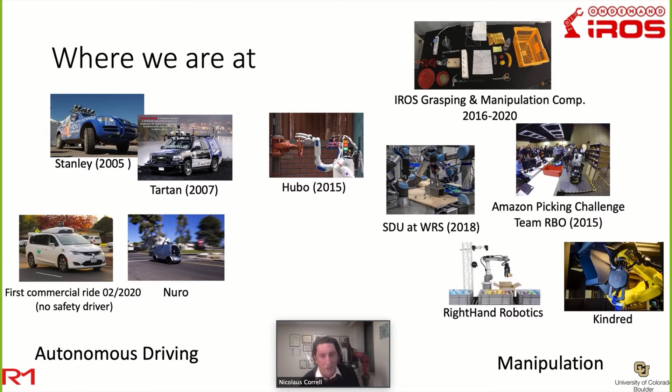The manipulation market is quite interesting because everything is already quite automated. If you think about, for example, a light bulb that goes off in your house, there is a system that would probably know that already. It could order this thing automatically and trigger this entire process of the raw materials being brought to a factory and then eventually shipped into a storage facility. And once you need your light bulb brought to your house, it has to be plugged in, and the old one has to be recycled.

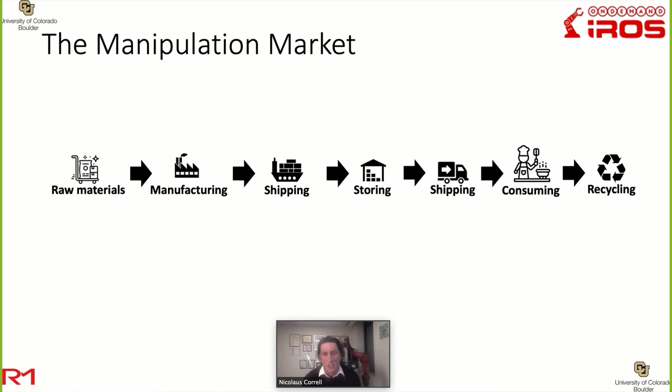Now, all of this is quite automated or could be automated except for the manipulation aspects of it. So we have companies that are working on that specifically. Since the 80s, we really have industrial assembly, welding, and things like this, and it's all very well known. More recently, we have a new breed of robots that are doing things more autonomously.

And here I try to put up a couple of companies right underneath where they are in that chain of consumption. So now you see there are even robots that can feed people. There are robots that can pick things out of shelves and fulfill an order. There's AMP Robotics here in Colorado that does recycling. But what these robots still don't do is they're still not really competing with humans when it comes to general manipulation. They are still machines that are purpose-built for their specific application.

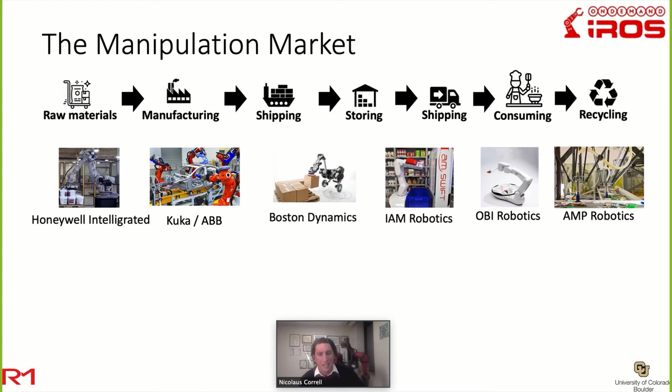So I think the challenge for us as a research community is to really get there, unearth that potential, because then you would have a robotic solution that could do all these things much like a human can.

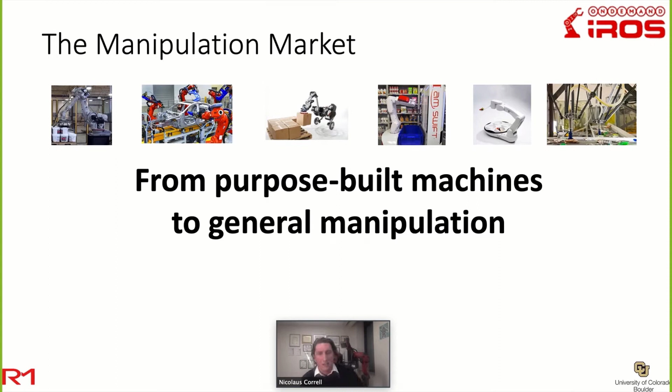So to understand what manipulation is, most people think about grasping as the problem of finding where to place fingers onto an object, so to get a constraint and not let it slip.

The actual real challenge is to put these constraints on the object at the same time. So if you think about a screw standing on a tabletop here, we all know how to grasp it with 2 fingers, but if you close your gripper now, the screw would fall, or worse, it would actually spin out of the gripper and leave the table.

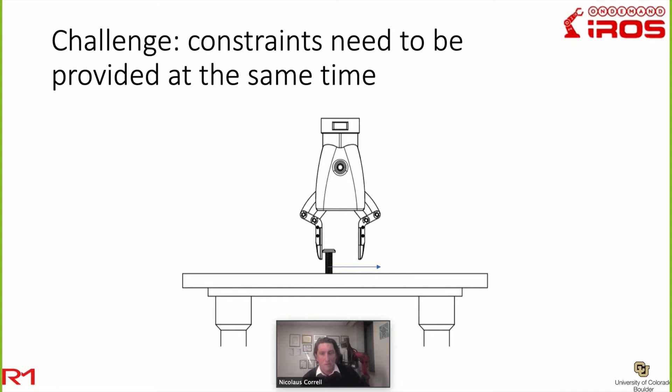So in order to solve that problem, you have 2 options. Either you increase perception accuracy, so you make sure you really know exactly where that screw is, and you position your hand accordingly. If you're lucky and you close your fingers, you will just reach the screw from both sides at the same time.

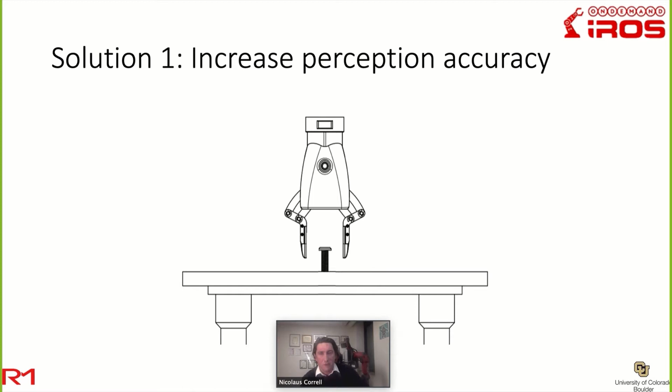The alternative or complementary thing you can do is use compliance. And in this case, the fingers are kind of spring-loaded. That's the best way to imagine it.

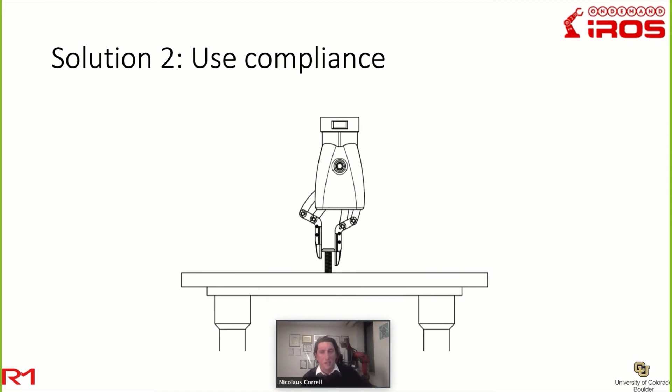They just keep closing until they hit something, but limit the force with which they do so. If you have very sensitive force control, you could imagine grasping that screw with two fingers without it falling or slipping. So in order to address these challenges, we developed a tactile sensor that can both increase perception accuracy and measure force.

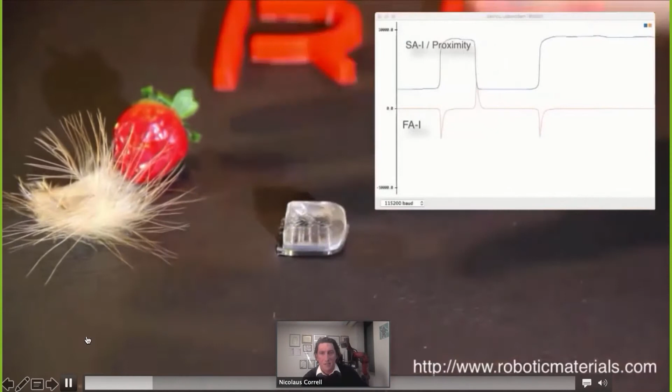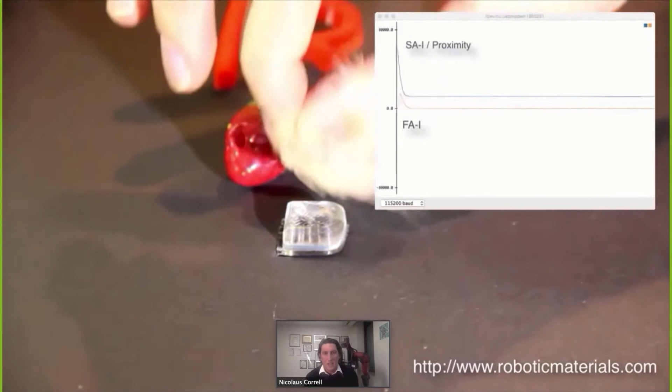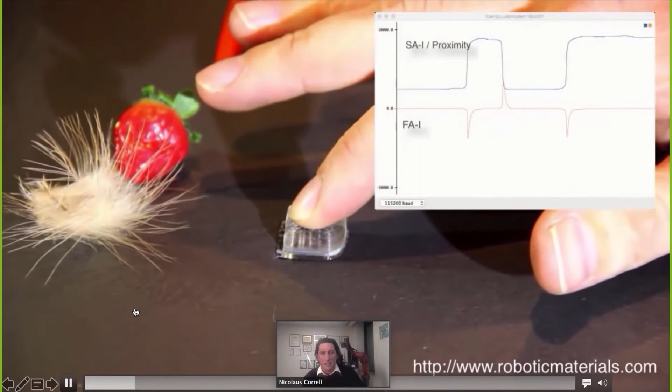So here it is. You see, we press it down, and I label these things SA1 and FA1, akin to the human tactile sensing system. What you see in the FA1 signal is the actual touch event—there's a touch and release event, let me play this again. Whenever the device gets touched, I get these peaks in the FA1 channel. At the same time, I see in the proximity signal the strawberry approaching in this case.

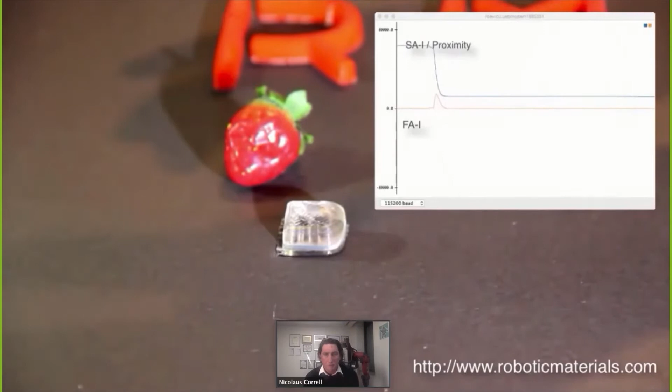So we were quite excited about this. Here's how it works: it's an infrared proximity sensor integrated into a flexible, transparent polymer of known width. The idea is that if I shoot the infrared out, I can get it reflected from an object and measure the distance to it. But I can also measure the deflection of the material when I exert some force—this is simply Hooke's law, F equals spring constant times displacement, which I can measure and from which I can then infer the force.

So here's how that looks. As I approach my sensor, I get an increasing sensor value. Then there's this point where I touch the object, where it turns from a proximity measurement into a pressure measurement. And likewise, once I release the object, I can tell the sensor value should be treated as a proximity value again.

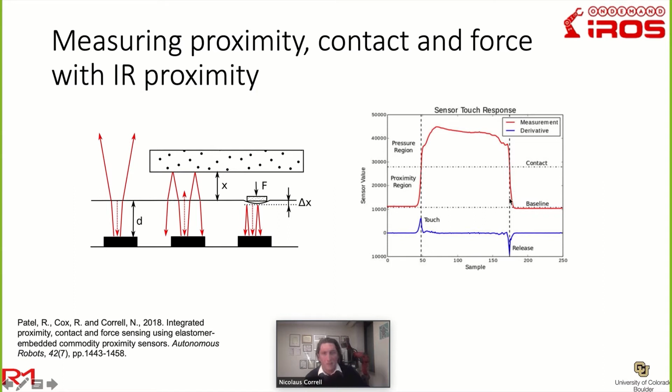So if you think about that in the context of grasping, you can use such a sensor to correct your approach and first align with the object, so as not to disturb it too much. Then you can detect the contact event, detect loading events, disturbances like wrenching or tapping it, and finally even replacing—when you place the object back on the table, after which you would release it.

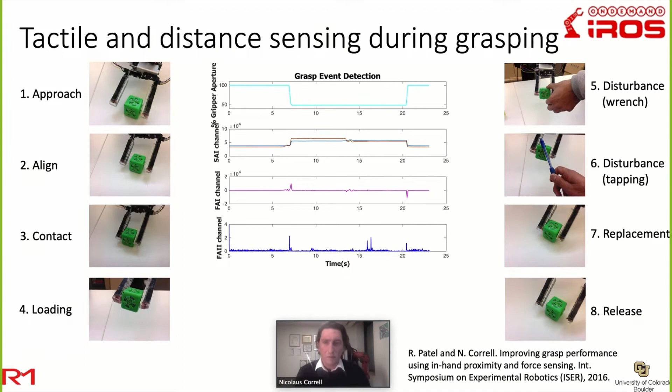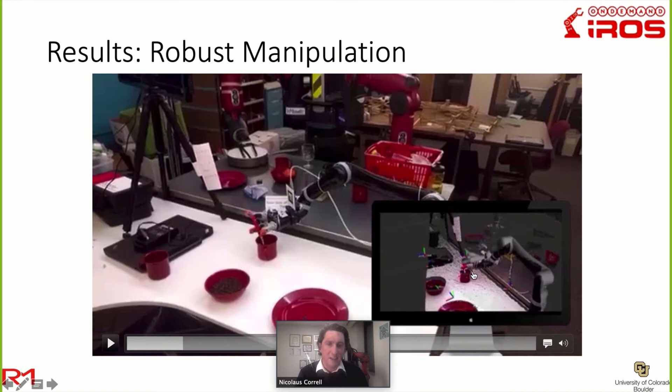So we used this in the IROS competition, I think in 2016, and made fingers for the Kinova hand. The idea here is that this spoon would actually spin out of control if you touched it too forcefully with your fingers, and it's also hardly visible in the ASUS Xtion 3D data feed. So the idea is we can use those sensors to actually find it and then manipulate it gently, which works very well, as you can see here.

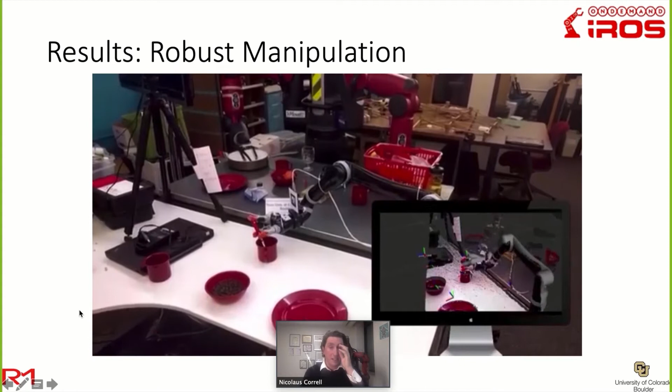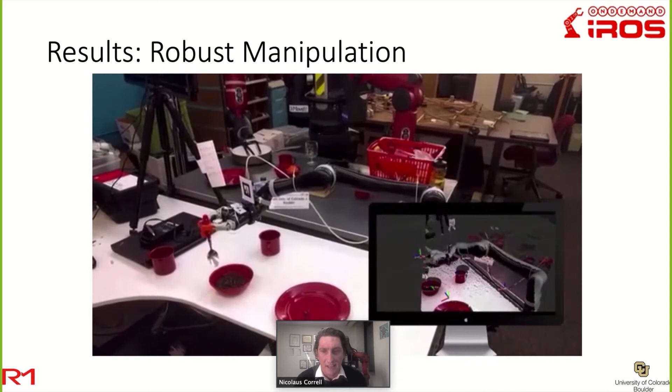Now the gripper grasps the spoon and does some scooping, where we can again use the sensor to detect the event of hitting those beans.

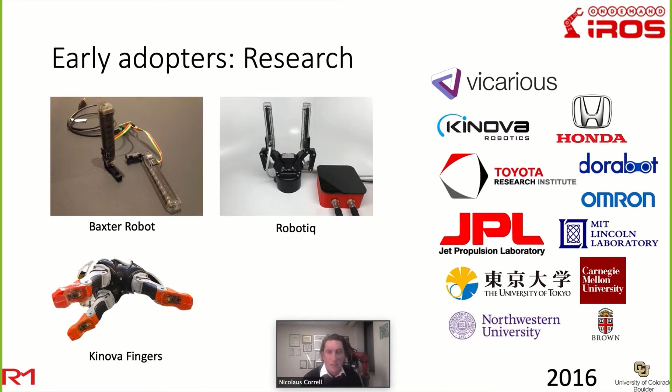So we got quite thrilled about all of this and thought, well, we finally solved manipulation, and we need to start a company to bring it to everyone. So what we did is we started selling that sensor for the Baxter robot, the Robotiq gripper, and the Kinova fingers, and many of you have bought one—we're very grateful for that because it really moved us forward. But it's also a difficult business to be in, to make sensors.

So we started the company to do more industrial manipulation things and raised $100,000 from the state of Colorado to the university, allowing us to buy a Universal Robot arm and then exchange a license with equity with the company.

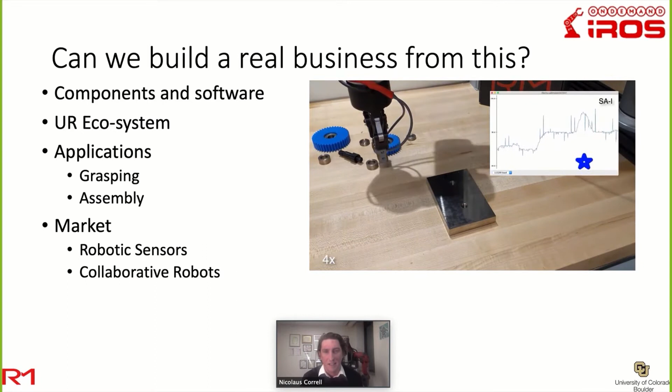So this is the product we came up with. This is an industrial assembly scenario, based on the IROS Manipulation Challenge assembly task. What we've done is create a URCap, a plugin for the Universal Robot, allowing users to use this sensor information in a meaningful way—for example, to detect something lying on the table or detect contact events.

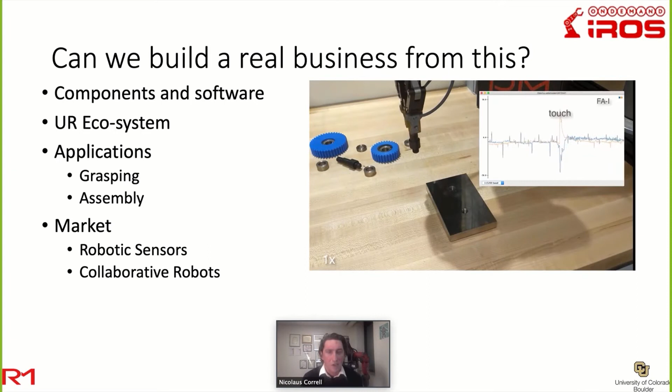So what we've done is programmed this assembly task and hard-coded it into the Universal Robot. I'll show now what the sensor would actually see, which with reasonable thresholds you can then use to control your process. So here are these touch and release events as I go and grasp and re-grasp the device.

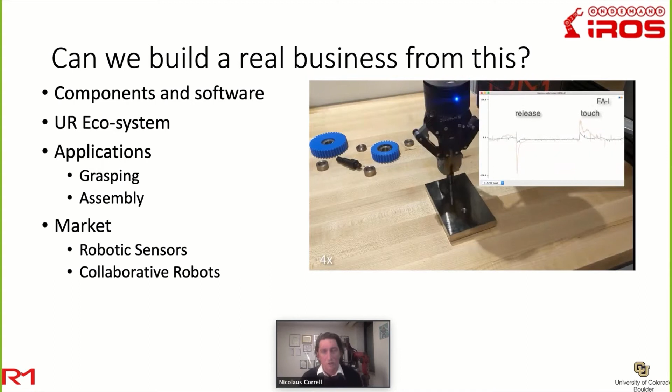Now the problem with this is the market is relatively small—it's people who own a Universal Robot and a Robotiq gripper and actually want to do these kinds of assembly jobs for other people.

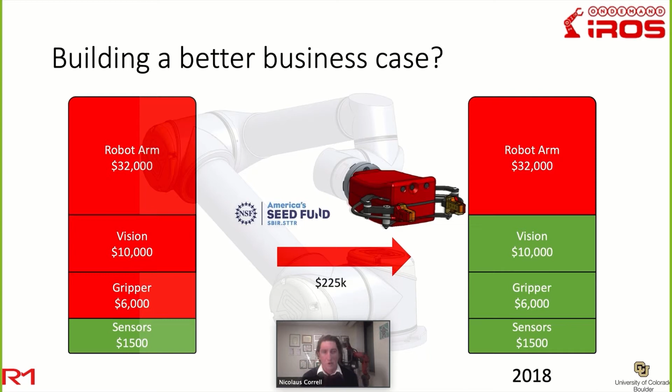There's another problem. If such a transaction takes place, then a lot of people make a lot of money, except us who sell the sensor. So we then went to the NSF, which has an SBIR program, which I can highly recommend to all of you who want to transition your technology, and received $225,000 to create a hand, which we thought will then allow us to capture not only the sensor's market share, but also the cost of the gripper and even a vision system.

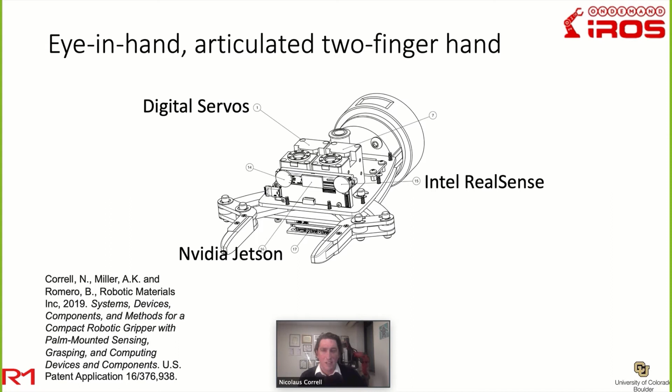So we then hired the first engineer, Austin Miller, fantastic guy, and he built this hand from scratch, designed it, and I would describe it as an eye-in-hand, an articulated two-finger hand, which has two motors to drive each of the fingers individually, an Intel RealSense stereo camera, and an NVIDIA Jetson that does most of the control and processing of the information. There's a patent that we submitted which describes the hand in great detail if you're interested in how it works. I'll show you some demos of what it can do.

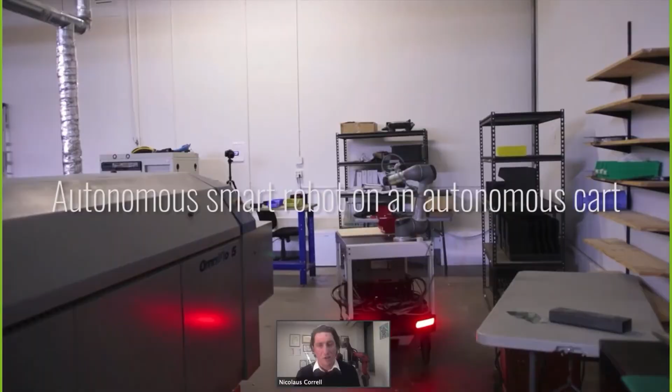So the first video we released was a mobile manipulation demo using the Canvas cart. Canvas Technology was a company in Boulder. It's now Amazon Robotics. And it allowed us to demonstrate approaching a bin without docking, without knowing exactly where the cart is, but to like 10 centimeter accuracy. Then using the onboard camera and processing to detect those screws and grasp them.

So we usually try to make videos where we show a sequence of actions, because then it is clearer that this really actually works, not only once but many times. Now it grasps a belt from the World Robot Summit assembly competition. It then drives the cart elsewhere in our shop and will drop the bin there. Let's fast forward that a little, because this is just driving.

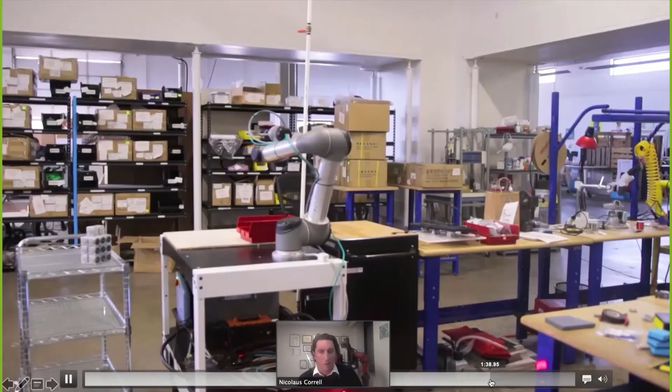Now it will again use the onboard sensors to look where the bin actually is, and then grasp it and place it. So with that you can create some quite reliable, robust real-world kitting tasks. And I will explain a little more how it actually does that. So the first thing is, the eye-in-hand is really the key to minimize calibration error. Whenever you have the camera elsewhere, you will have up to centimeters of error, because it's just impossible to calibrate the camera the same way everywhere in your environment.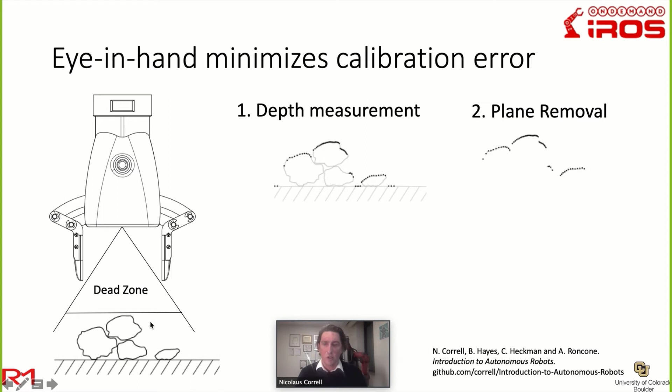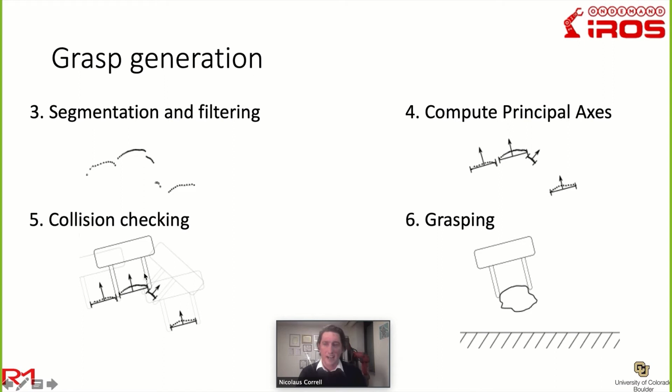Now, when you look at stuff like this from above, you can approach it up to 12 centimeters. There's a dead zone, but then get a depth measurement, segment and filter the point cloud information, compute the principal axis of the point cloud, do a collision check to select the best grasp, and then grasp.

So here's another video on how this works. This is a bin picking application. We use fake fruit because for obvious reasons we can't keep them around for too long. I mention it because they're actually much more slippery than real fruit and also more reflective. This works again quite well. The robot approaches the bin, looks inside, and does what I just described to select the best grasp.

There are a couple of error cases that occasionally happen with this kind of setup. Let me fast forward. Sometimes you might not find an object. You might need to scan the environment. Here it slips, which is due to the slippery objects, but then it will look again and actually grasp it.

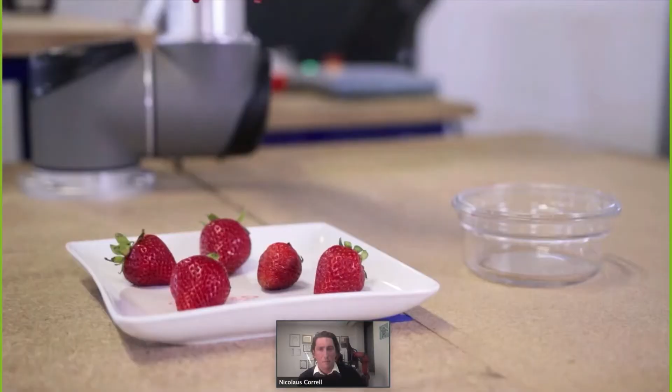So here is an example where we use some real fruits. These are strawberries. Generally, there's this belief that you need soft actuators to handle fragile objects. That is not the case. It is sufficient to control the force. And so you see how I can grasp all these strawberries and not crush them.

So to give you an illustration on how this works, the key is very simple impedance control, which we achieve by simply controlling the current of the digital servo motors. And so in this case, the torque that you get is proportional to the maximum current you set. If you set that current to be very low, you can deal with situations like this where the gripper gets stuck at an obstacle that you might have not seen.

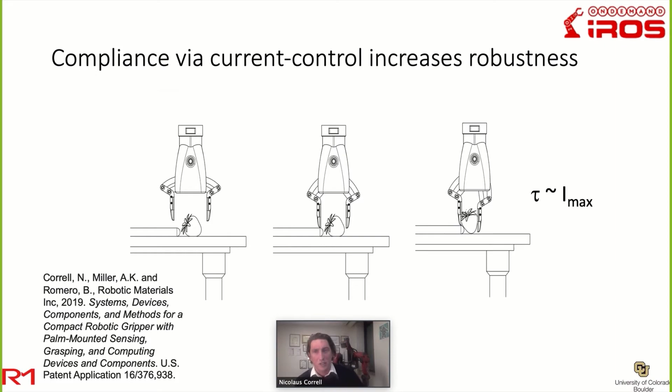Any normal gripper would now not be able to close anymore. Our gripper will just stop one finger and keep closing the other. And again, the torque is controlled in such a way that the strawberry wouldn't be squished. So another example of what the hand can do is another mobile manipulation task.

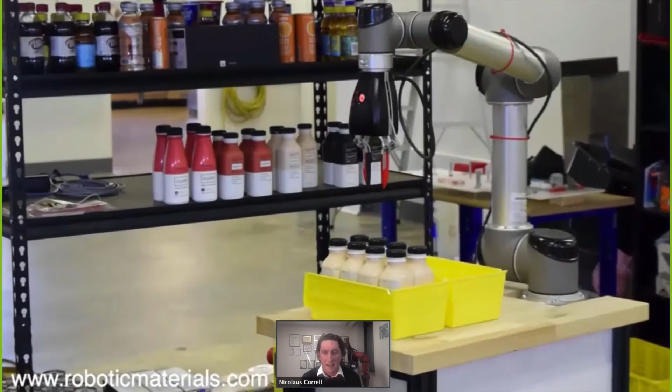This is all autonomous. We just assume that we know how the robot has to move in order to insert a bottle. So this motion is a pre-programmed motion that we associate with bottles. So we know that we can grasp them at the top and then make that motion which allows them to pivot. Everything else is autonomous. It looks where things have to be placed every time. It looks where the bottles are in order to grasp them correctly.

And so again, in order to show that this actually works more than once or is actually autonomous, I think the only way really is to show you sequences like this. So I think it will do one more bottle and then replace the old one, which you saw it placed itself. So again, it has to look first where it actually is.

Also, this motion is of course pre-programmed. We know that we can push bottles back and create space that way. It's a behavior that is associated with that object. So now it will look again. It adjusts a little bit its pose to grasp and puts in the final bottle. So what is new here, or how to do that?

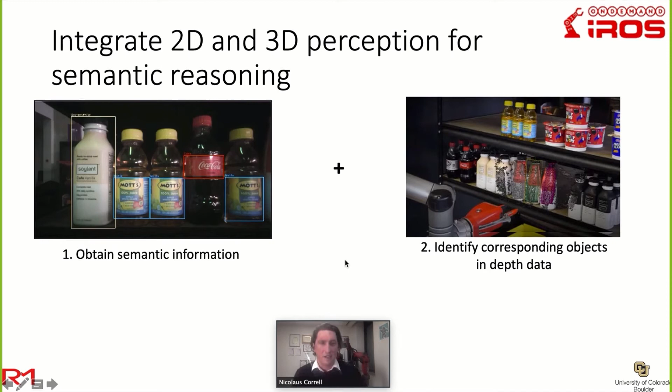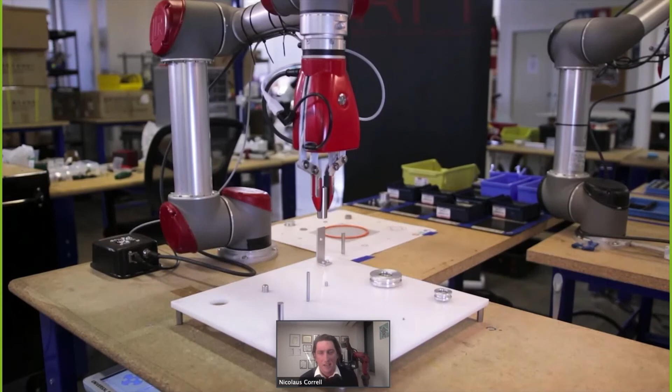There's some videos on the website if you're interested in this. But essentially, we are picking all these parts that you see here from these bins to create that kit. And now we use force-based insertion to insert these items. This is one more peg and hole, but let's wait for the belt assembly.

It just checked where these pulleys are. Now it uses a behavior that we pre-described to actually add the pulley. Again, it uses force measurements to test whether it works. Also, that works very robustly, so we can do this over and over again. You can also join us at the IROS assembly competition this year, where we assemble a slightly different taskboard.

So in order to do this, you need one more thing, which is a force torque sensor. This is a 6-DOF sensor that measures the forces and the torques at the wrist. And once I have such a thing, I can define behaviors like move down until touch and gently touch the surface of the table or the assembly plate.

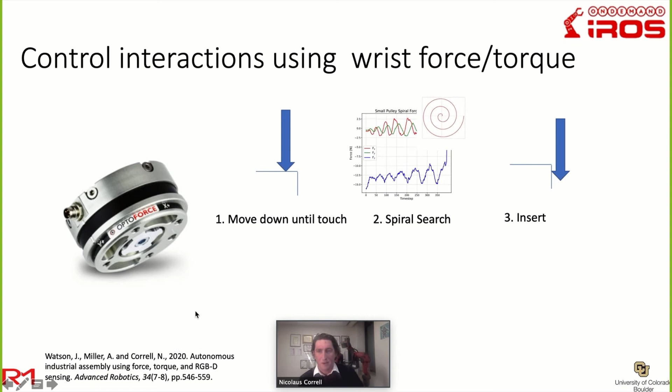If you're interested to learn more, we have a journal paper that just came out on the WRS challenge and the items we use there. Now the question for me, which also guided my talk, is: is this general enough for business? Are we already there that industry can actually adopt these things? And if not, what is it that we need to do?

And so we made a couple of observations at the competitions, trying to sell these things and writing papers about them. The first one is really that general solutions are very expensive and slow, and specific solutions are always better. So if you're at a competition and you're competing with somebody who made a machine to just insert those specific objects, then that solution will probably be better.

The other thing is general solutions are difficult to configure. So robots need to be truly intelligent so that you can work with them. If you think about the restocking task, I can imagine telling the robot where these bottles are and where to pick them, but very small aberrations will throw it off, and a human worker would probably just look in the vicinity of the location that they were given. A robot cannot do that, so we need to really also up the general intelligence in order to get to general manipulation.

The second observation we made is that return on investment, ROI, only works on a subset of customers. I asked my LinkedIn followers how much they would pay per month to save $200 in gas. The hyper-rational answer is $200 because you save the environment and you save a trip to the gas station. Many people, though, are actually not willing to pay more than $50. And a slight majority believes in some kind of fairness in that they are not ready to give someone else the lion's share of their savings.

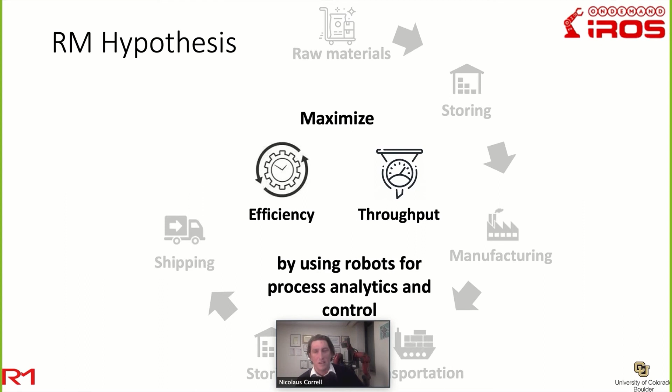So in our company, we have a hypothesis that we can maximize efficiency and throughput for manufacturers by using robots for process analytics and control. So instead of having a robot replace a human worker, the robot actually does some bookkeeping and things that help with the process that a human wouldn't be able to do. So the approach is to look back at all the technology we developed over the last years and really break it into these different components that can help us to do that.

And first, to start with deploying intelligence into the manufacturing line using simple vision products. Then use autonomous mobility to help move products, and only then at the very end use autonomous manipulation to complete the automation cycle.

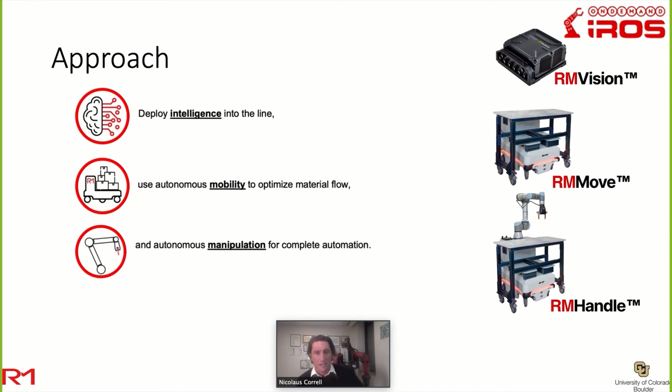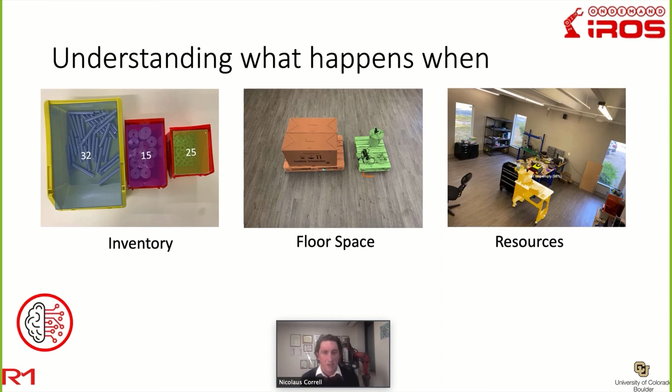And to give you some examples of what vision could do: already you could take inventory of things, look into bins, estimate the volume of what is in there. You can track your floor space. And in manufacturing, that's very important because every inventory you have anywhere or stuff that builds up somewhere is waste. And you can also find resources like empty carts or pallets or things like that.

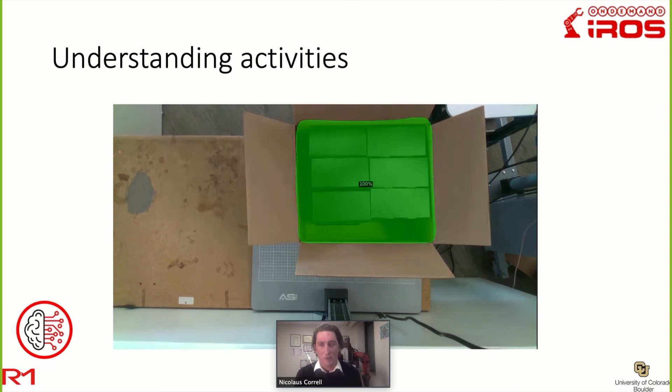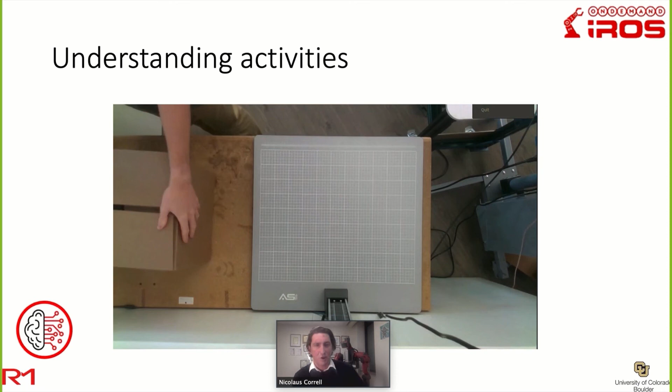The other thing is with vision and the 3D vision that we developed in this manipulation context, you can understand activity. So in this case, this is a packing task, and the question is: is the box open, yes or no? And this is our accuracy to do that. So even if people put in dunnage, we can still see that the box is still being packed, and once it's closed, we know it's done, and we can get a cart to fetch it, or we can bring the next box or print a label or something like this.

In the flow shop, you pass on the object immediately. Now, of course, you're trading throughput with mobility. So even though a flow shop is much faster than a job shop, you actually need to move much more of the materials, and this only becomes attractive if a robot does it.

Also, you would need to work in parallel, which is something you could more easily do if some of these stations were manned by robots and not people.

So what's next? I think what we are seeing is that combining sensing, actuation, and planning can really unlock orders of magnitude efficiency gains. So even if you just double your throughput in a certain factory, it could allow you to make it efficient enough to not order it from abroad, which would let you save on shipping and do a more lean process in which raw materials are directly turned into products and shipped to the consumer.

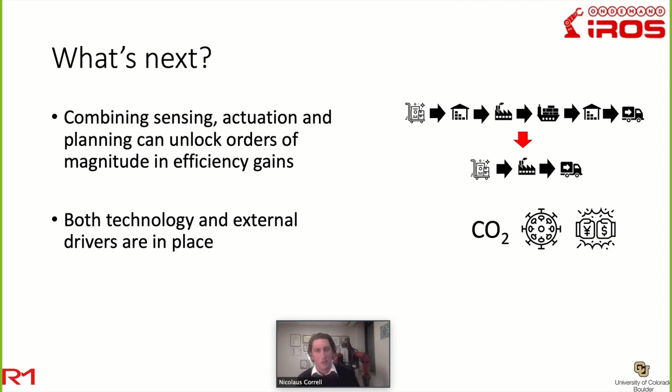I think the technology and external drivers are in place. We have global warming. We have COVID-19, which has changed how manufacturers think about workforce and supply chain issues. And we have tariff wars, which make it more attractive to do things in a more localized manner.

The question is, what is the research that we should do? I would like to close with 3 ideas on where I want to go with my research. The first one is, I think we have to resuscitate classic AI expert systems, planning, and semantic reasoning.

If you think about learning to woodwork, you would get a book about woodworking, maybe watch videos about woodworking, and then eventually start trying it yourself and do some experiential learning. Right now, learning is fully focused on experiential, from-scratch learning. Instead, I think we should use deep learning to ground rules and deep reinforcement learning to ground controls. But we need new learning paradigms to deal with discrete representations and blend them with continuous ones.

But if I have a robot sitting next to me, the robot wouldn't really know what to do when I say, hey, help me assemble that shelf. So there is some kind of programming aspect, but there's also some kind of reasoning aspect that humans and robots need to improve on.